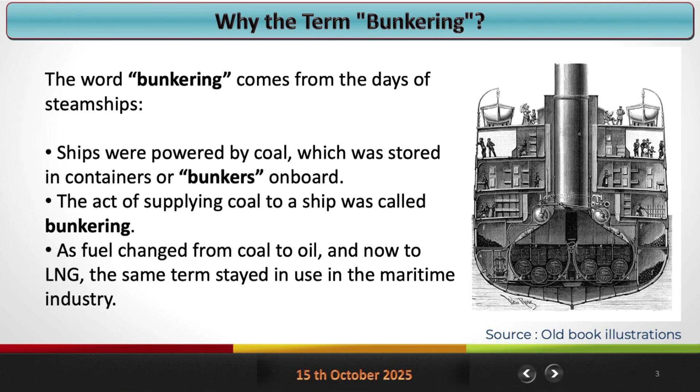So what does bunkering mean, and where did the term bunkering come from? In the past, ships were fueled by coal, which was stored in containers called bunkers. Transferring this coal to these containers was called bunkering. Fast forward, coal was replaced by fuel oil and marine gas oil, and we still use fuel oil bunkering. And now we have LNG bunkering.

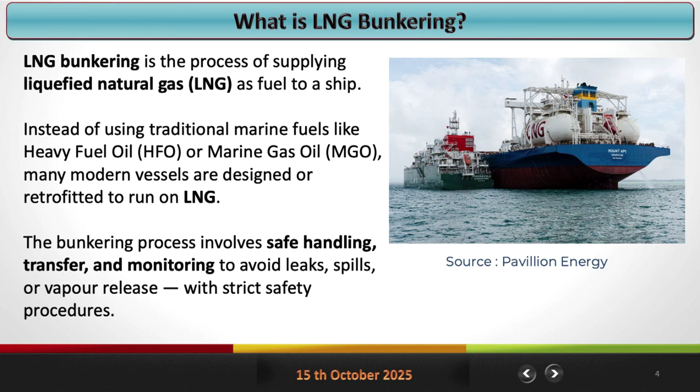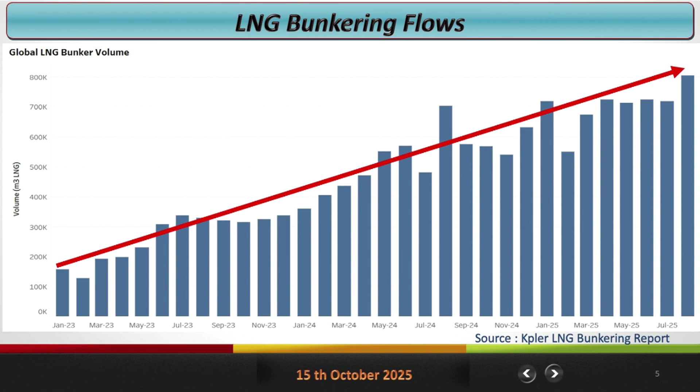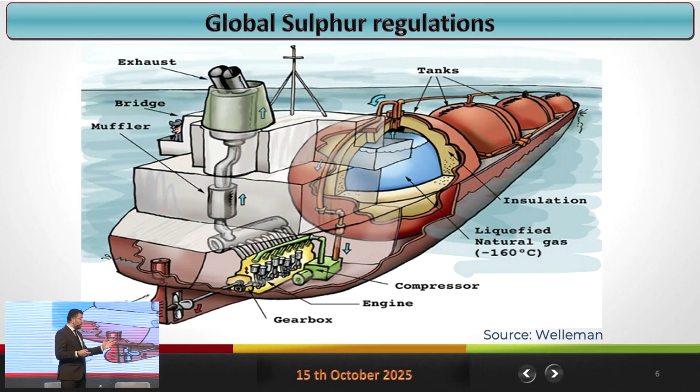In the international scheme, we have regulations that govern marine pollution by ships. The IMO, the International Maritime Organization, has a convention called MARPOL, the Marine Pollution Convention, which regulates pollution from ships - pollution from sewage, garbage, oily water, and emissions from diesel oil or marine fuel used by ships. The MARPOL Convention limits the emission of sulfur oxide, nitrogen oxide, particulate matter, and even has a strategy to push the reduction of CO2 and greenhouse gas. This is for the international level.

And we have regulation which is regional. For example, for European ports, they have stronger and more stringent regulations regarding sulfur emission and greenhouse gases, and even now we have this emission trading system for ships calling at European ports and sailing from European ports, and we have the alternative fuel infrastructure regulations as well.

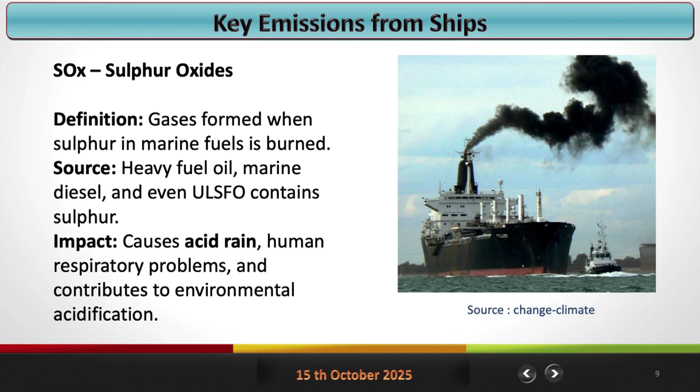So we go briefly through these key emissions. As I said, we have sulfur oxide, the gases formed when the marine fuel, or when sulfur in marine fuel, is burned. It causes acid rain, human respiratory problems, and contributes to environmental acidification. The second one is nitrogen oxide - a group of gases formed from nitrogen during combustion at high temperature, which also leads to acid rain, ozone formation, and respiratory issues.

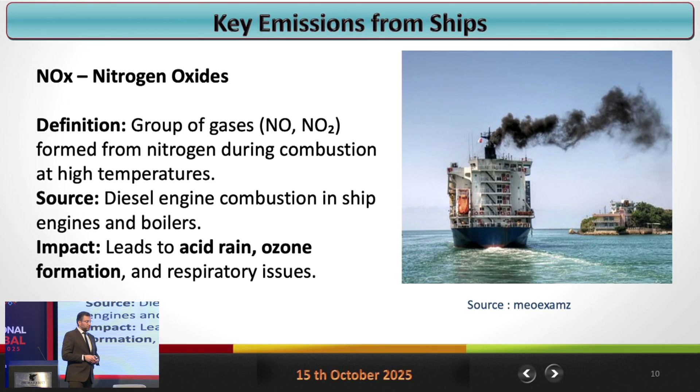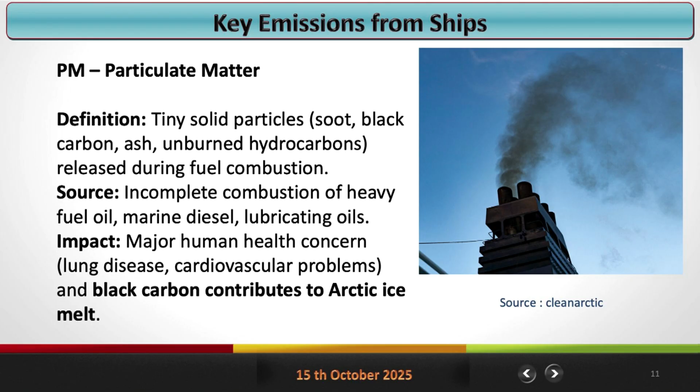The third one is particulate matter - tiny solid particles generated from incomplete combustion of heavy fuel oil, which causes major human health concerns. And of course, carbon dioxide, the main greenhouse gas from fossil fuel combustion - from marine diesel oil, from fuel oil, and even from LNG - which contributes to global warming and climate change.

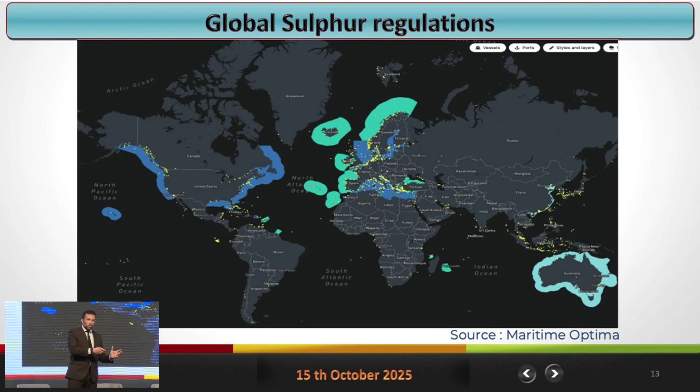Let's say if I'm sailing around the world, I have regulation for sulfur content in the marine fuel. If you are entering this area, let's say US coast or Canadian coast, you need to change over to another fuel which has lower sulfur content. This is how the IMO has been pushing to reduce the sulfur content in marine fuel.

Before 2012, the sulfur content globally that ships were using was 4.5%, whereas in the emission control area, whenever you are entering this area, they have been using 1.5% content of sulfur. Fast forward, after 2020, IMO pushed to reduce the sulfur content to 0.5% globally.

Whereas in the emission control area, let's say if you are entering the Mediterranean Sea, you need to change over to fuel oil with sulfur content less than 0.1%. You can see the European ports are the early adopters. Since 2010, they have adopted regulation to reduce the sulfur content in the marine fuel.

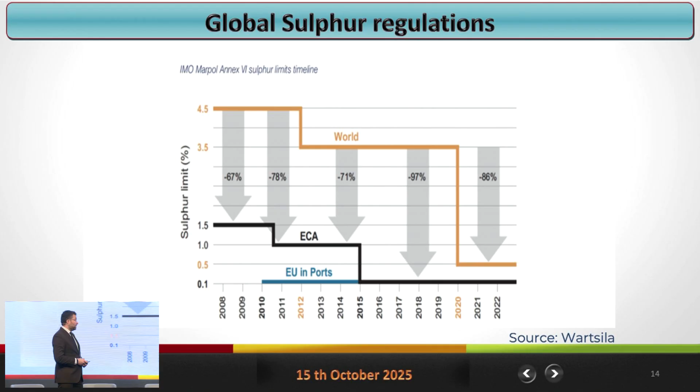And LNG, since the beginning, was complying with this regulation because there is no sulfur content in LNG. So here's the comparison between ULSFO and LNG.

ULSFO is the ultra-low sulfur fuel oil used in the emission control area, with sulfur content less than 0.1%. For the sulfur oxide, even the ULSFO is meeting the IMO regulation. The LNG has zero SOx emission.

For the nitrogen oxide, let me just come from here so you can see. The ULSFO still generates significant NOx, whereas LNG has up to 85 to 90% lower NOx emission. For particulate matter, ULSFO is considerably higher than LNG, which has negligible particulate emissions.

For carbon dioxide, even the greener marine fuel compared to heavy fuel oil or very low sulfur fuel oil, there is no CO2 reduction, and LNG is still cleaner than the other fuel oils, with 20 to 25% reduction in CO2.

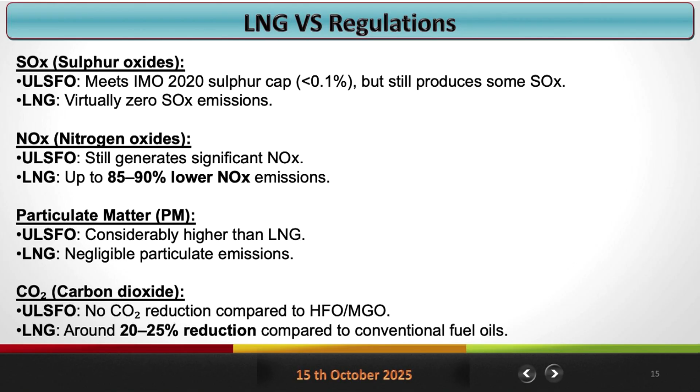The container ships load from Asia, let's say in Yangshan, and discharge their cargo in Europe, stopping in Singapore and Gibraltar or Algeciras. These container ships are 350 meters, 400 meters, big ships, requiring large amounts of fuel oil, which means large amounts of LNG. This is why we see these hubs have the major LNG bunkering operations.

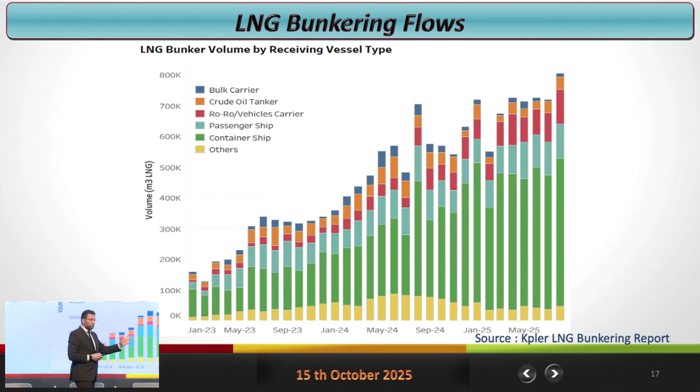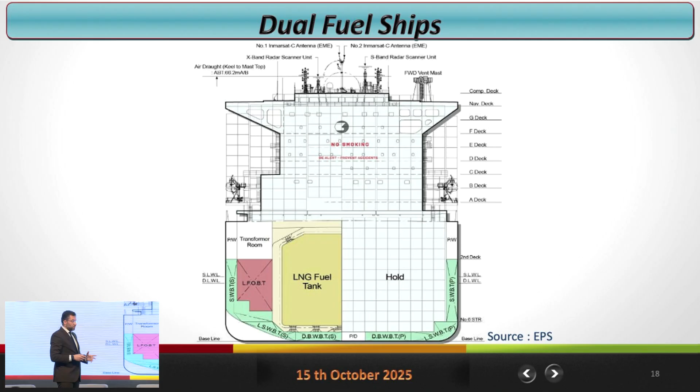These tanks can hold 15,000 to 20,000 cubic meters of LNG. Large ships require large LNG as fuel.

As I said, large ships require large LNG as fuel, and this quantity needs large LNG bunker barges. We can see that we are requiring larger LNG bunker barges, 14,000 cubic meters and up to 20,000 cubic meters, and you can see the trend is increasing.

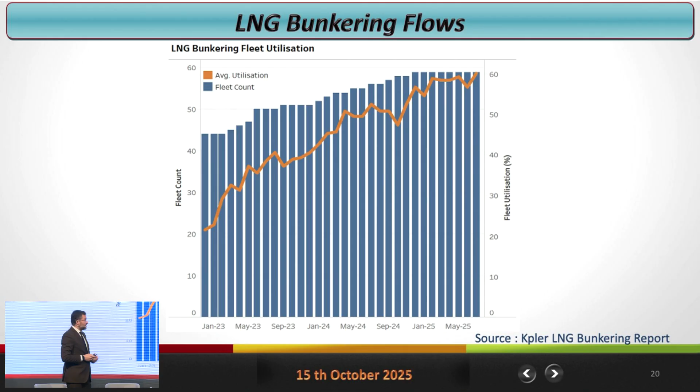In January 2023, not all the bunker barges have been used totally. Fast forward to August 2025, all the bunker barges have been fully utilized. When I say average utilization is 4 operations in a single month, each bunker barge has been used more than 4 times, or carried out operations 4 times in a single month for the full fleet of LNG bunker barges.

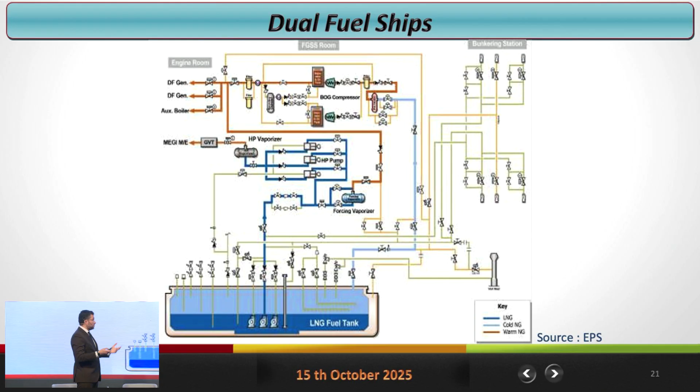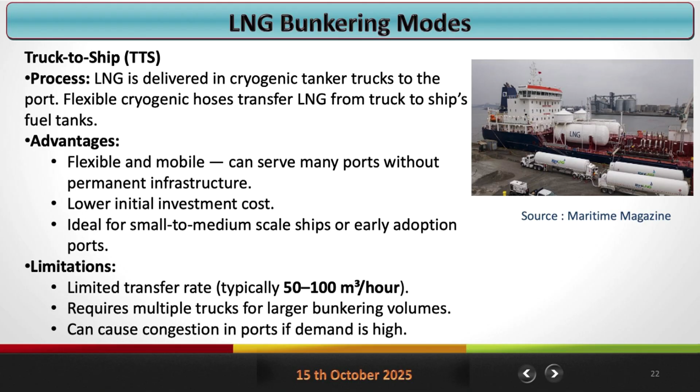This method has advantages and limitations. It's flexible and mobile, with lower initial investment, but it has a limited transfer rate of 50 to 100 cubic meters per hour, and requires multiple trucks for larger bunkering volumes.

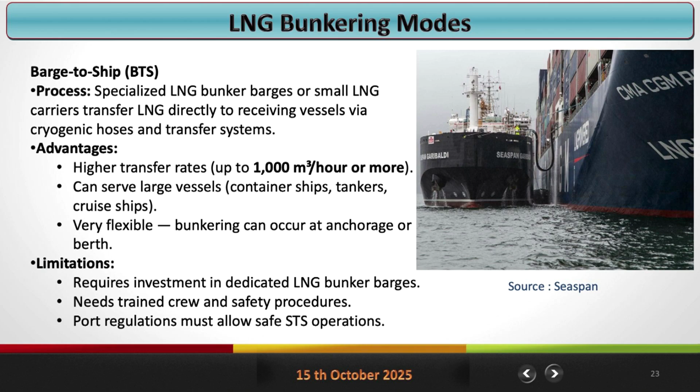But it requires investment in a dedicated LNG bunker barge, and now all the shipyards are fully booked, so if you order an LNG bunker barge, it takes time for the ship to be delivered.

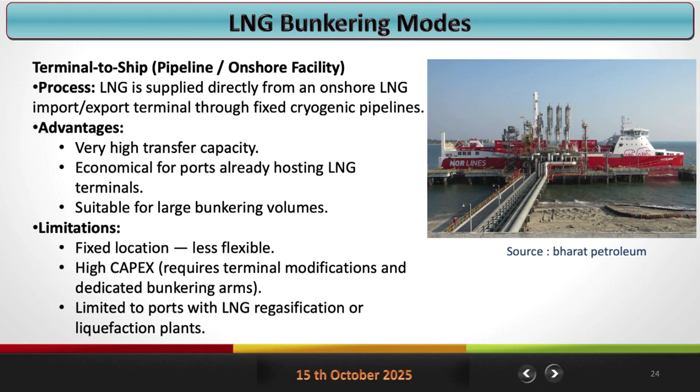The third method is terminal to ship bunkering operation, where you bring the ship to the export or import terminal with a dedicated jetty for LNG bunkering. It has very high transfer capacity and is economical for ports already importing or exporting LNG. But it's a fixed location with high capex, requiring the ship to come alongside only for LNG bunkering, pilotage, tugs, and extra fees to receive the bunker alongside.

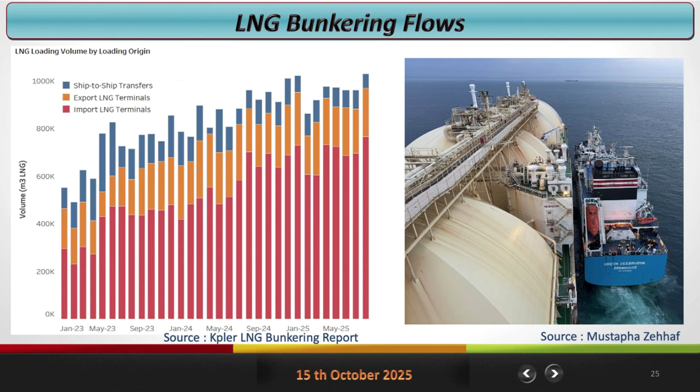The picture on the right I took myself. We lifted the cargo from an import terminal and went at anchor, and this bunker barge came to us, lifted the cargo at a time of 8,000 to 10,000 cubic meters, and went to load the LNG dual fuel ships.

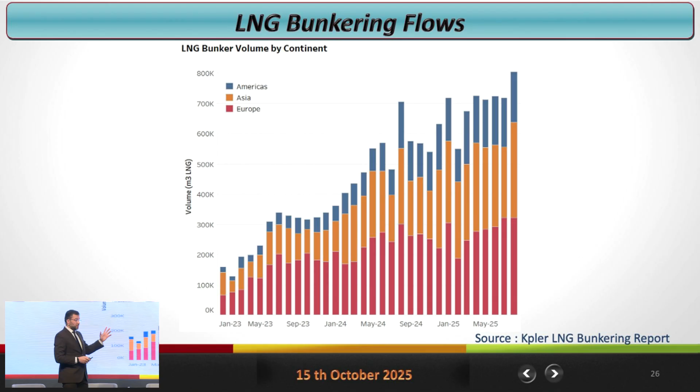This is the LNG bunker volume by continent. We've seen that the top four hubs where LNG bunkering is happening around the world are in Europe and Asia, and you can see clearly that the amount is increasing in these two continents.

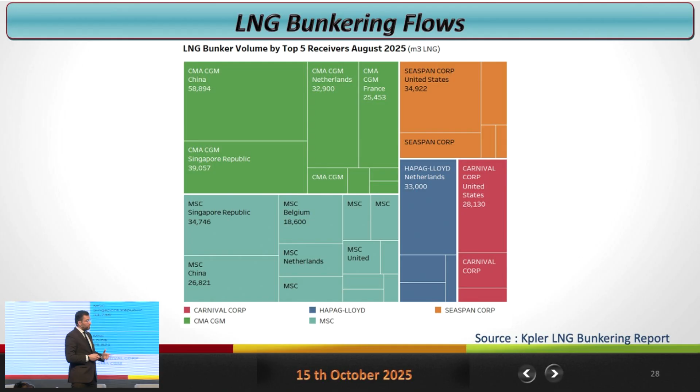And the fifth one is Carnival Corp, which is a cruise shipping company.

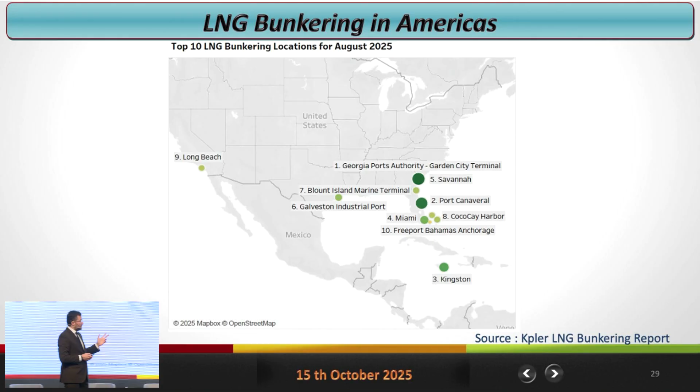Here in the Americas, the top three LNG bunkering hubs are Garden City Terminal in Georgia, United States, Port Canaveral also in the United States, and Kingston, Jamaica.

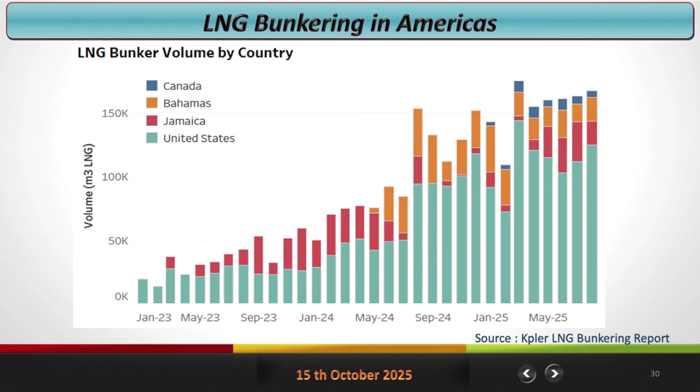The LNG bunkering volume in the Americas shows the United States leading the countries with the most bunkering operations throughout the years. You can also see, in blue color, LNG bunkering in Canada now with Seaspan, which started LNG bunkering in Vancouver, British Columbia.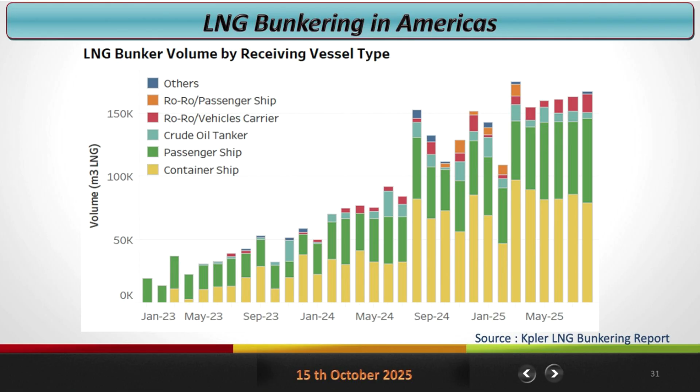In the Americas as well, container ships are leading the ship types for LNG bunkering, followed by cruise ships.

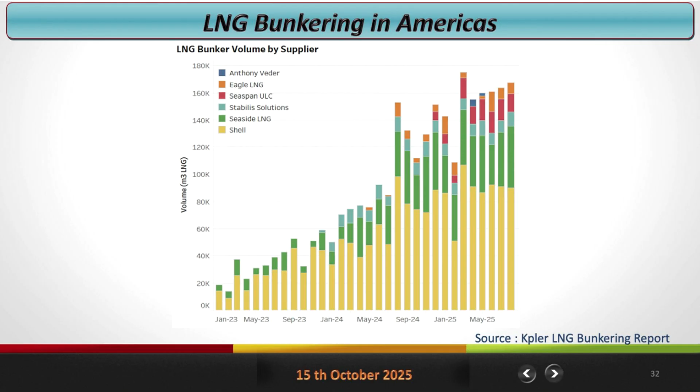For the suppliers in the Americas as well, Shell is leading the top suppliers, followed by Seaside LNG and other suppliers. And that's it. Thank you very much.